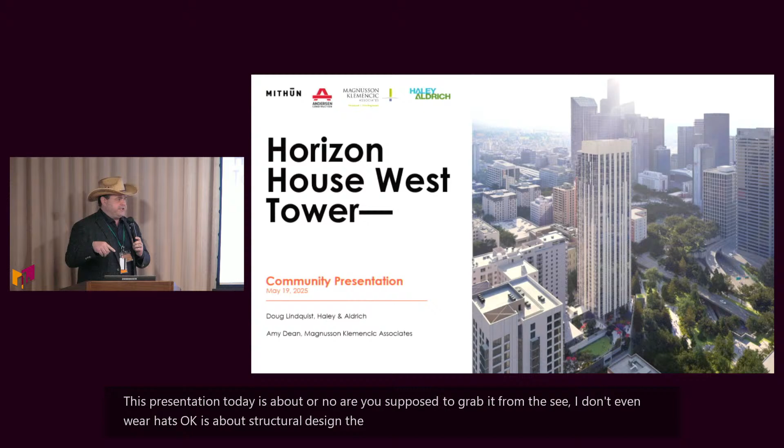All right, so welcome. This presentation today is about structural design. The last presentation we gave was more about logistics, which we'll probably have a follow-up presentation on. But this one, due to popular demand, is about structural design, going into depth about the soil mechanics of the footprint of our West Tower project.

And with me we have Amy Dean from MKA, Magnusson Klemencic Associates, and also Doug Lindquist from Haley and Aldrich, the geotechnical engineer. Both firms are top shelf, very well known throughout the Seattle area. Also in the room we have Mithun Architects, and also Andersen Construction.

Great, all right, so yeah, let's just get started. This is Doug Lindquist. The other one is Amy.

Thank you, it's a pleasure to be here. My company starts each meeting with a safety moment, so I thought we'd do that right here.

And what to do in the event of an earthquake: you should drop, cover, and then hold on. Maybe find a table or something like that you can get under if there's a seismic event, and then wait it out. You do not want to run out the front of the building, because things sometimes fall off the fronts of buildings.

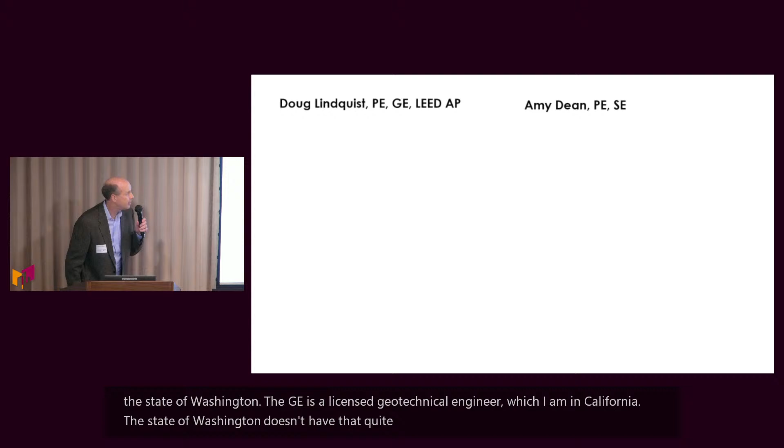PE stands for Professional Engineer, a license in the state of Washington. GE is a licensed geotechnical engineer, which I am in California — the state of Washington doesn't have that quite yet. Amy has SE, which is structural engineer, and then LEED AP is Leadership in Energy and Environmental Design, Accredited Professional.

So I'm a local person. I grew up a little south of Seattle, went to the University of Washington for my bachelor's and master's. Then I got active in public organizations related to my field, becoming president of the Seattle Section Geotechnical Group of ASCE, the American Society of Civil Engineers.

Then I joined the ASCE 61 Code Committee for the seismic design of piers and wharves. Then got active in the Earthquake Engineering Research Institute, becoming a board member of the state chapter. And because I work so closely with structural engineers like Amy, I wanted to better understand their language, so I joined the Structural Engineering Association of Washington and got involved in their Earthquake Engineering Committee.

I had the opportunity to go to Japan after the March 2011 earthquake and tsunami. That was actually 14 years ago this month that we were in Japan observing the damage from that earthquake. And we have a very similar hazard off our coast of Washington to the type of earthquake that occurred in Japan at that time.

One of the highlights of my career was speaking at my master's thesis advisor's symposium in honor of him — he literally wrote the book on geotechnical earthquake engineering. And another highlight of my career is being here with you all today. So thank you.

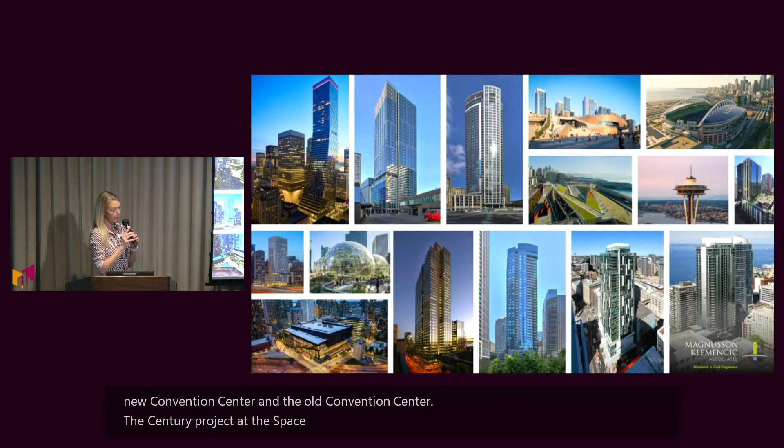Here are just a handful of Seattle-based projects that we worked on as structural engineers: the Amazon Spheres, the new convention center and the old convention center, the Century project at the Space Needle, Lumen Field, the Overlook Walk, and the new aquarium that just opened earlier this year. I'm going to pass it on to Doug, who will talk about Haley and Aldrich's work.

Some of you in the construction business may have heard of the company Hart Crowser, which I worked with for the first 22 years of my career. They were purchased by Haley and Aldrich 5 years ago, so I'm referring to all the projects as Haley and Aldrich projects. These are a number of projects I've worked on, including some Amy mentioned. The one on the top left is the 4th and Madison Tower.

Here we had to retain a building on two sides with the excavation going adjacent to it.

We're going to try out this mic instead. I'm seeing some positive signs there.

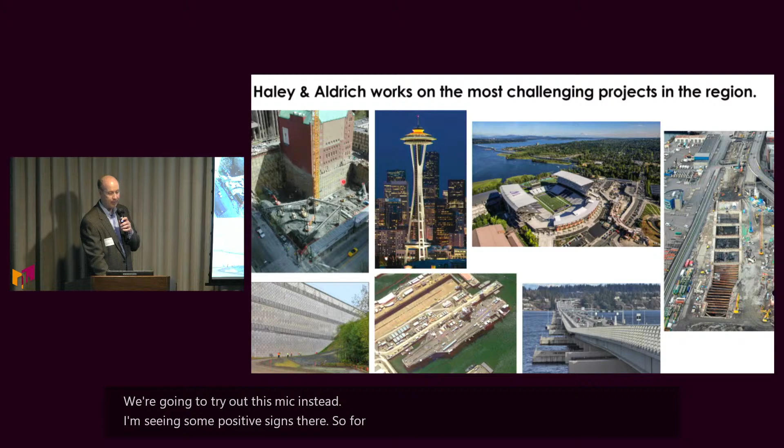For this site, we had to excavate on two sides. Our project for Horizon House, we're just doing the excavation on one side. I also worked on the Century project with MKA, and the Husky Stadium, Go Dogs, where we remodeled that I want to say 10 or 15 years ago. All three of those first projects I worked on with MKA.

The project on the far right is the SR-99 launch portal for the Bertha tunnel boring machine, and the viaduct, which has now been removed, is shown in the top right of that image. My company was brought in because of our deep excavation design experience and seismic design experience, and we are the engineer of record for that largest bored tunnel in the world.

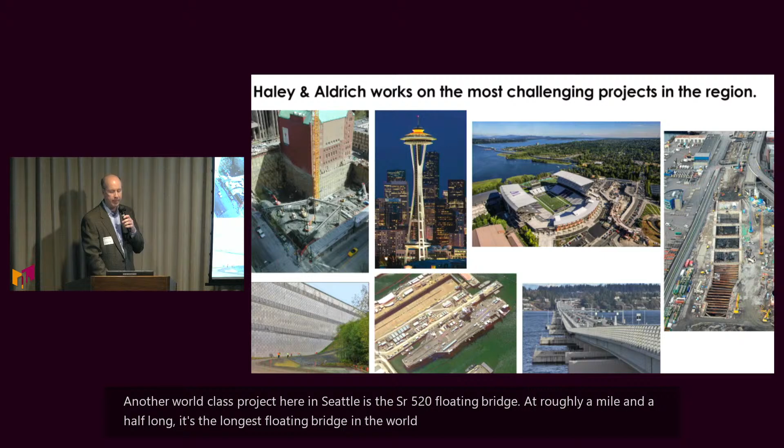Another world-class project here in Seattle is the SR-520 floating bridge, roughly 1.5 miles long. It's the longest floating bridge in the world, and we were brought in to design the anchors that are at the bottom of Lake Washington.

My company has also worked on all of the aircraft carrier piers in Puget Sound. There are 3 of them, and Pier B at Puget Sound Naval Shipyard is shown at the bottom.

One of my favorite projects that I did early in my career is a large mechanically stabilized earth wall, the tallest wall of its type in the Western Hemisphere. It essentially has steel reinforcing strips going back into the soil, and concrete facing panels holding the soil in place. It's 135 feet tall and was part of 13 million cubic yards of soil that came in for the construction of the third runway in the early 2000s at the SeaTac airport.

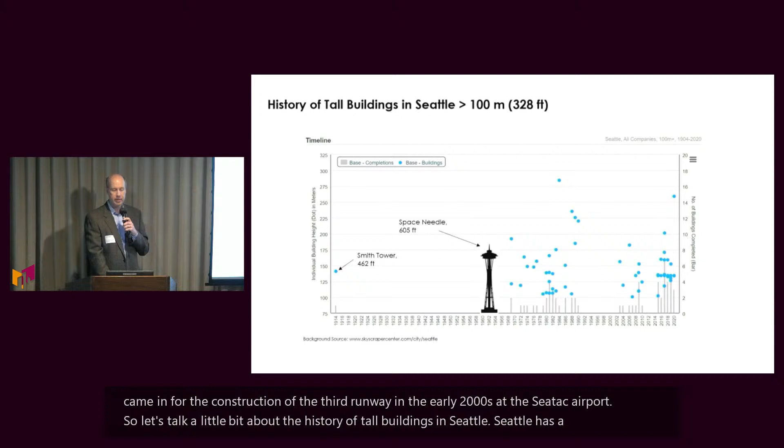Let's talk a little bit about the history of tall buildings in Seattle. Seattle has a really rich history dating back to 1914, when the Smith Tower was constructed at over 462 feet tall - an amazing civil engineering feat put on by the engineers of that time frame. That was a mere 63 years after the Denny Party settled in West Seattle in 1851, so an incredible feat there.

That was the tallest building west of the Mississippi until the Space Needle was constructed for the 1962 World's Fair. Unfortunately, I didn't work on that, but I did get to work on the Century project where we evaluated the Space Needle as part of the recent upgrades.

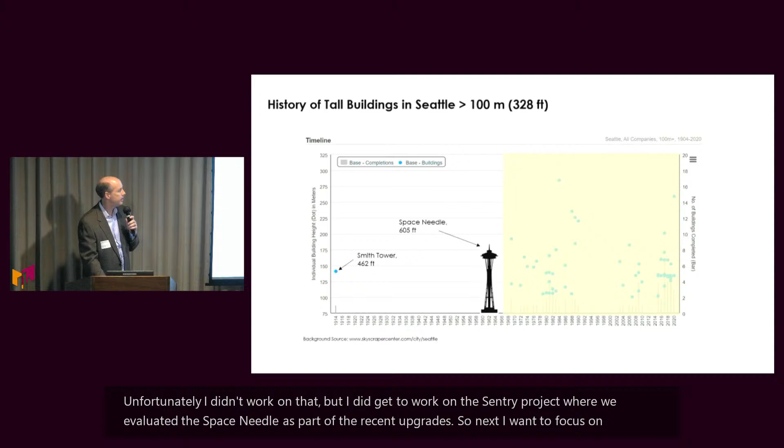There was a question to Horizon House about hiring an established geoengineering company to work on the Horizon House Tower, and I'd say you have very qualified geotechnical and structural engineering companies working on this building.

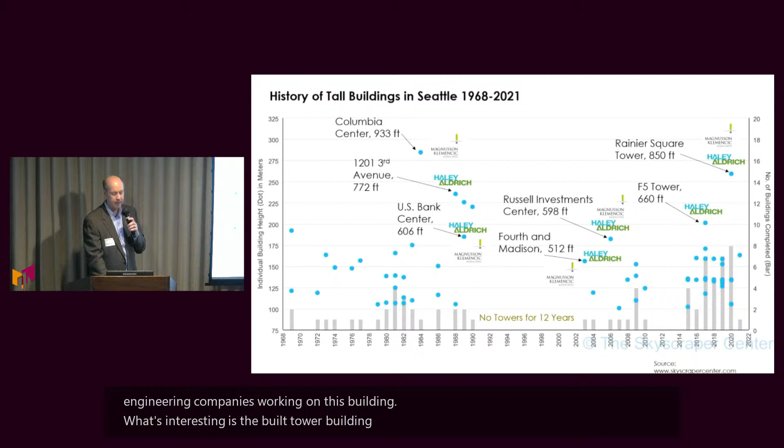What's interesting is the tower building is cyclical. There were a bunch of buildings in the 70s and 80s, and then there were no towers for 12 years, from '91 until 2002. Part of that was the recession of the early 1990s, the dot-com bust, and also just overbuilding of the downtown core in the 80s.

After that, we had a series or period of buildings. Then we had the Great Recession—because when you start a building, it takes multiple years to actually get it built, there's a lag between when you start and end. So after a building boom, there was the Great Recession from 2007 until 2009 that caused another period of no buildings being constructed.

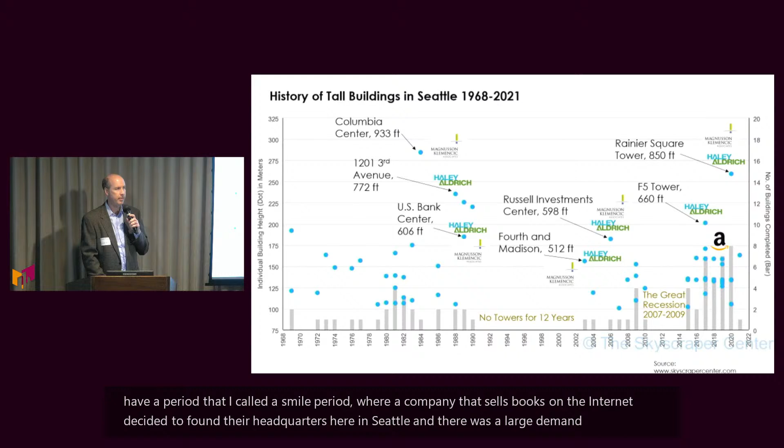And then after that, we have a period I call the smile period, where a company that sells books on the internet decided to found their headquarters here in Seattle, and there was large demand for office space and apartments to support the growth of the city. It was an incredible growth boom, which was really neat to see, this being my home city.

What that looked like in 2017—this picture shows where the tower cranes were. Many of you probably remember this, but Seattle had more tower cranes than any other city in the United States. More than Chicago, two or three times as many as New York, twice as many as Los Angeles. Just an incredible growth for a relatively small city compared to these other cities.

Then two years later, there's a comment saying Seattle has the most cranes in the country for a third year in a row. This is an incredible amount of growth for what was a relatively small city. Again, 59 cranes at that time—twice as many as Chicago and New York, a third more than Los Angeles, twice as many as Portland and San Francisco.

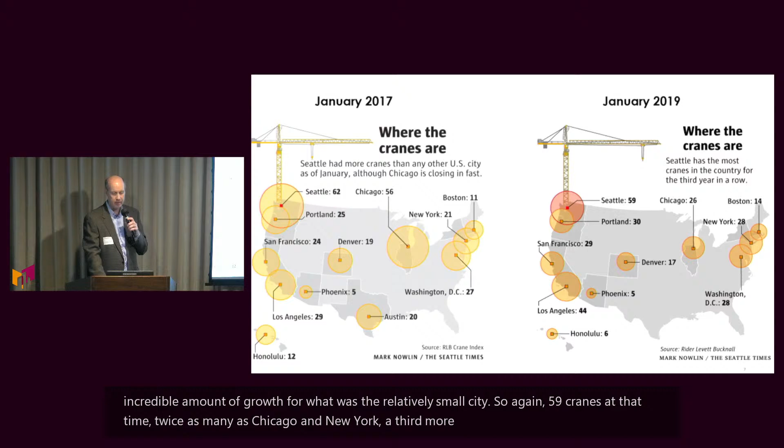So there's been—Amy and my firm being headquartered here—we all got to work on a number of high-rise buildings during this time frame.

So let's now move into the Horizon House project. A little bit of background: two tall buildings, and for the most part we're focusing on the seismic design of the new West Tower.

This is a cartoon I kind of like about a developer in Pisa who wants to save some money by avoiding soil tests—the Horizon House didn't do this. We've had the chance to do a number of soil tests at this site, and that's the first thing we do when we start a project. First we look at what existing information is available, then we supplement that with collecting additional soil information. Another big part of it is earthquake engineering, which is a large portion of the presentation today.

Other geotechnical elements include earth retention, shoring, or support of excavation. That's what you see when you drive around downtown Seattle and there's a big hole in the ground with a vertical cut right next to the city sidewalk and streets—that's what I'm talking about there.

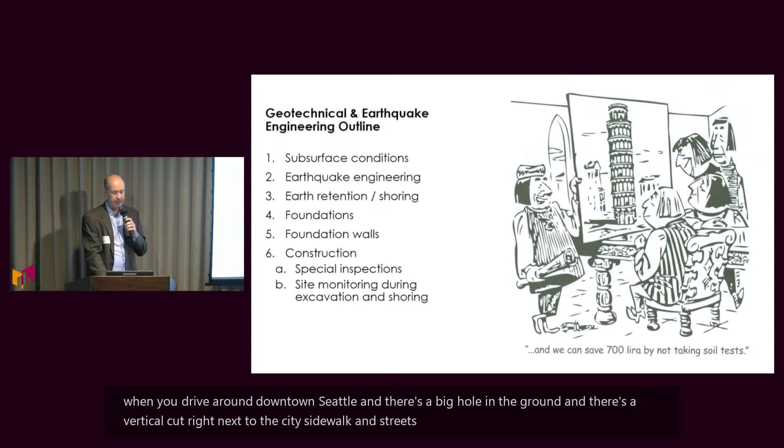Obviously you need a foundation for the tower, and it's important to put that on the appropriate soils. As you're coming back up, that support of excavation is usually temporary, so we have foundation walls. We provide recommendations for Amy's team to design those foundation walls as well as the foundation. Then during construction, the geotechnical engineer is on site to observe the soil conditions and make sure they're consistent with what we expected during our explorations and design. We also monitor nearby buildings, the support of excavation, and other elements.

These are a couple of pictures taken during our exploration program, showing the drilling rigs. We collect samples every 2.5 to 5 feet vertically during the exploration program at discrete locations.

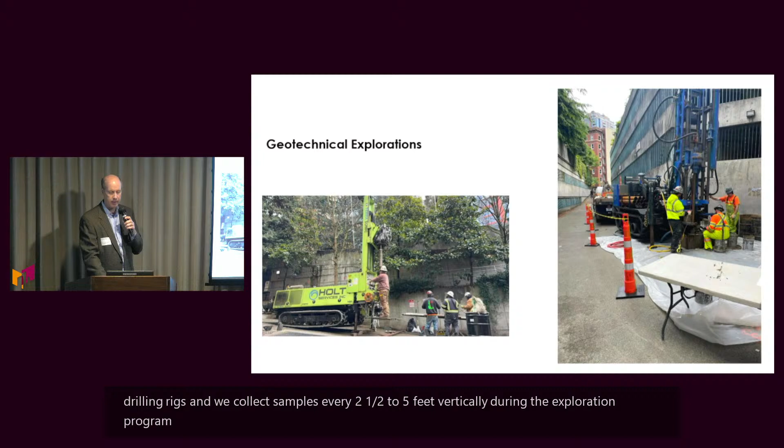I know this is kind of a tiny picture, but it's a satellite image illustrating the site. The site's bounded roughly where I'm showing the cursor, and all the black dots are existing explorations from before we started this project, while the blue dots are the new explorations we performed as part of this project. I also worked on the North Tower at Horizon House, so I'm thrilled to be involved in this project as well.

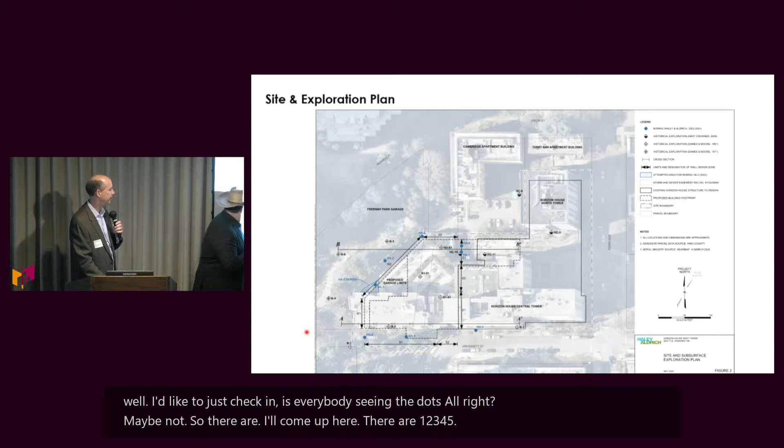I'd like to check in—is everybody seeing the dots all right? Maybe not, let me come up here. There are one, two, three, four, five, six, seven, eight blue dots, and the blue dots indicate new explorations for this project. And then the black dots—where were the previous ones? There's a black dot where the cursor is: here, here, here, over here, up here, down here. So another half a dozen or so.

This line in the middle, what is that line for? That's the one indicating the E1 zone, and E2, a distinction we used in our design recommendations. So those are cross sections, if you will.

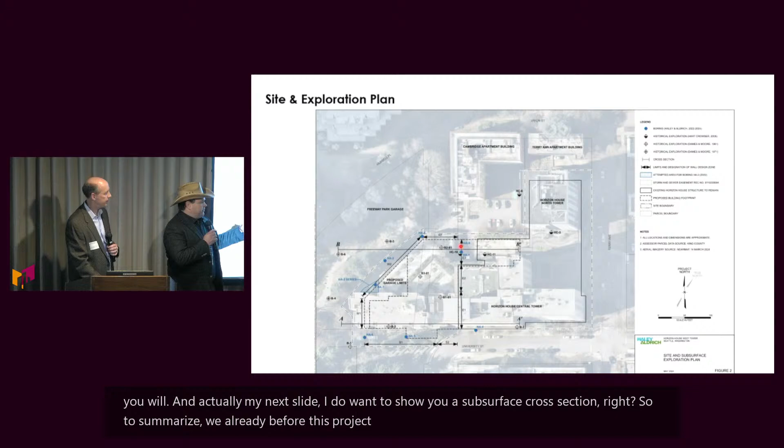My next slide, I want to show you a subsurface cross-section. To summarize, before this project began, there was already historic record from prior borings of the soil types in the West Tower region. Since then, we've bored an additional 7 borings just to reinforce our understanding of the subsurface conditions.

Thank you, Eli. You're welcome.

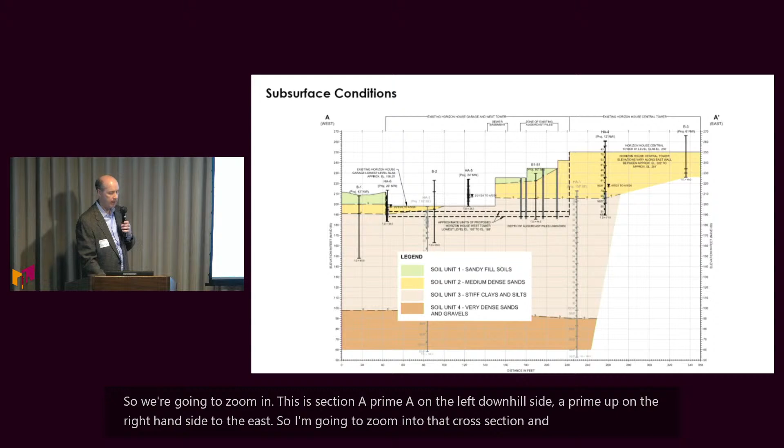So we're going to zoom in. This is section A prime, A on the left downhill side, A prime up on the right-hand side to the east. What you can see is the existing West Tower extends from here to here. So this white space in the middle and these steps are part of the existing West Tower.

And what we're going to do is follow this dash line down through here, and we're going to essentially dig out a little bit deeper to install a larger new West Tower in this footprint.

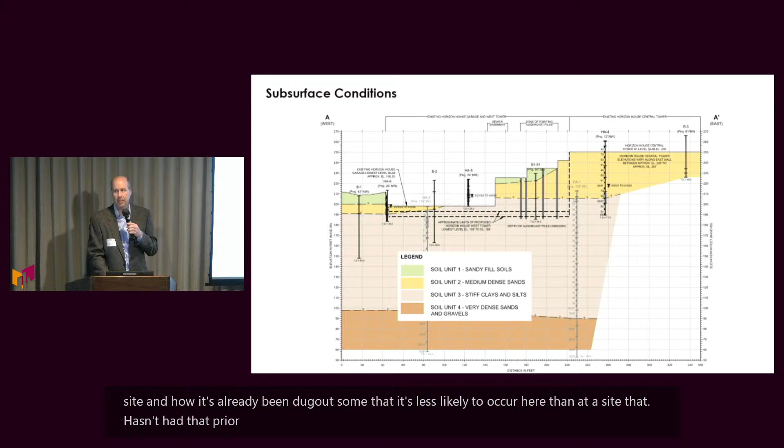There was a question about any archaeological artifacts we could come across during the excavation, and that's always a possibility, but given the previous activities and construction at this site, and how it's already been dug out some, it's less likely to occur here than at a site that hasn't had that prior development and buildings on top of the soil.

So we have 4 different soil layers. We have a green layer up at the top that's a fill type of soil - you wouldn't really want to put the foundation on that. Then we have this light tan or yellowish tan, which is a nice sand and gravel. Below that, we get into clay and silt. The yellowish layer and this clay silt are both glacially over-consolidated - the glaciers compressed those materials, so they're good for supporting new vertical loads. The lowest layer is very deep, a very dense sand and gravel. So the building foundation is intended to be on these more competent materials at depth, as opposed to the greener soil up near the ground surface.

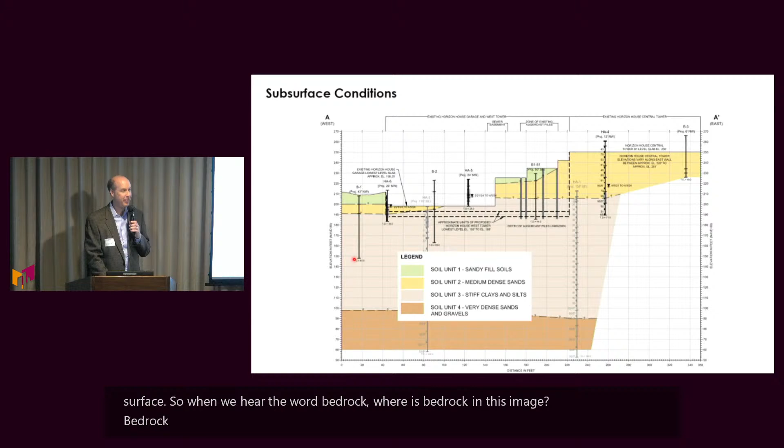So when we hear the word bedrock, where is bedrock in this image? Bedrock is about 3 to 4 miles below the ground surface in Seattle. There was a question about that, about, hey, can we put this building on bedrock? None of the buildings of this type, including the 850-foot tall project that Amy's and my firms worked on, are bearing on bedrock. They're bearing on glacially over-consolidated soils. We had 2,000 feet of ice compressing all these soils, and that's much heavier than any new building we're going to put on them.

So this is a favorite cartoon of mine. It's Calvin and Hobbes. Calvin's asking his dad, how do they know the load limit on bridges, Dad? And Dad says, well, they drive bigger and bigger trucks over the bridge until it breaks. Then they weigh the last truck and rebuild the bridge. And Calvin says, oh, I should have guessed. And the wife says, dear, if you don't know the answer, just tell him.

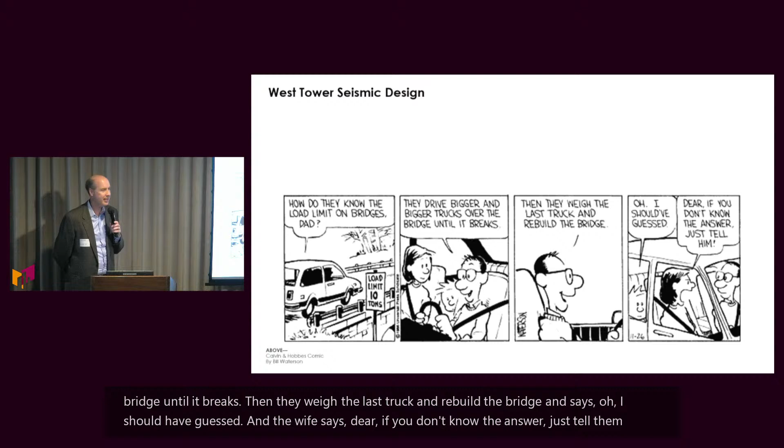So this is an example of performance-based design, and you're going to hear about performance-based design quite a bit in this presentation. But this is not how we go about doing it - this is an expensive and risky way of going about performance-based design. Instead, we use computer simulations to do our performance-based design, especially the performance-based seismic design we're talking about today.

As part of that, we start out with the geotechnical engineer performing what's called a probabilistic seismic hazard analysis. Some of the things I talk about and that Amy talks about are rather technical in nature, but I've been told that you are a very well-educated audience and lifetime learners, so hopefully you don't mind hearing some new things and are open to this.

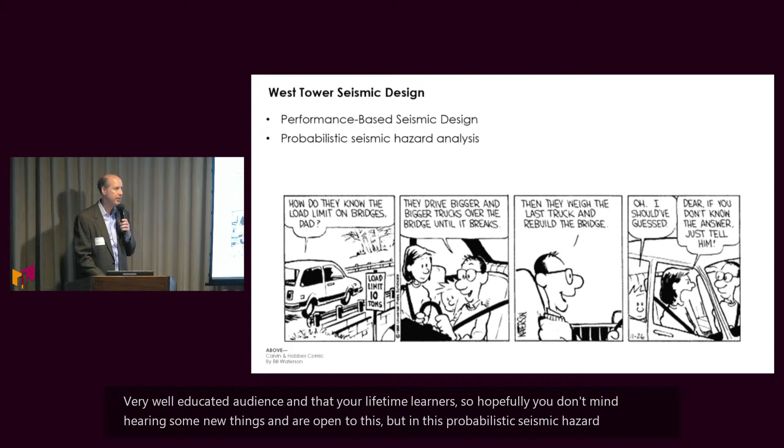In this probabilistic seismic hazard analysis, we take a look at all the possible earthquake scenarios that we think are reasonable, including big events off the coast and shallow crustal things nearby. We assign the likelihood that they occur or how frequently they occur, and then we look at, if that occurs, what will the damage be or the amount of shaking at our building site.

So when we do that, oftentimes people ask me, what magnitude is my building designed for? Magnitude 5, 6, 7, 8, 9? My response is that it's designed for all of them, because we are considering the full suite of earthquakes that could occur at the site.

We also know that there's some earthquakes that we just don't know about, and so we've assigned some probability of an earthquake occurring on a fault nearby that we just don't know about yet. We've tried to do that in a logical manner.

Once we know what the hazard is, we select and scale ground motions, and we've given Amy and her team 22 ground motion pairs. Those are orthogonal ground motions, 2 horizontal components, for her to put as input into her performance-based model and design model of the West Tower.

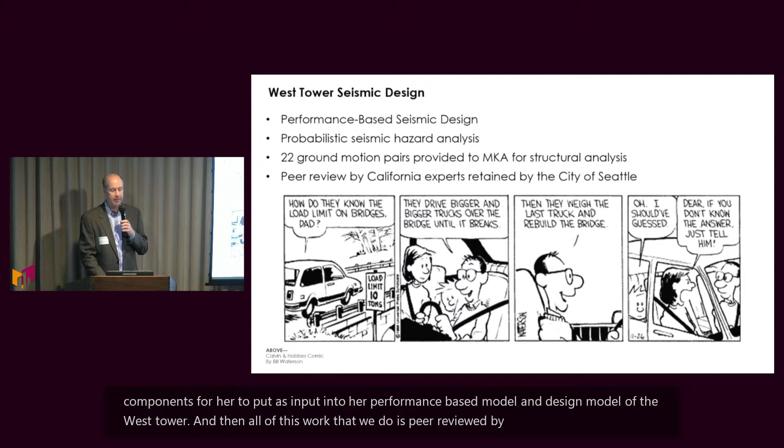All of this work that we do is peer-reviewed, usually by experts from California in earthquake engineering, structural engineering, geotechnical engineering, and seismology. Those experts are retained by the city of Seattle, so they have no vested interest in this project going forward. They could shut it down if they didn't agree with the recommendations that we're putting forward.

There was another question about whether there are any shortcuts or difficult decisions we had to make in the design process to save money or something like that. Really, there's not the opportunity to do that. We need to meet the standard of practice and the codes and procedures, and it's reviewed by experts from out of town, usually, who are very experienced with that. The city could potentially do this themselves, but they want really the top people in the industry to do it, and that's why they outsource that review, whereas they would just review most normal buildings in-house.

I heard this was one of your homework assignments, to watch this video on the great earthquakes of the Pacific Northwest. Did some of you watch this? Yeah, glad to hear it.

I would ask what your thoughts on it were, but I don't have time, and I don't think Eli wants me to spend that much time hearing from all of you today. But I would like to say that I thought it was a really good, unbiased account of the subduction zone hazard that we have off the coast. I thought he did a good job dispelling the myth that a large magnitude earthquake off the coast could cause a tsunami in downtown Seattle.

I also thought it was really neat that he mentioned Brian Atwater's work that identified an orphan tsunami that occurred in Japan. The tsunami occurred in Japan, and they were able to track it back to the parent earthquake that occurred right here in the Pacific Northwest on January 26, 1700, around 9 p.m. It's also really cool.

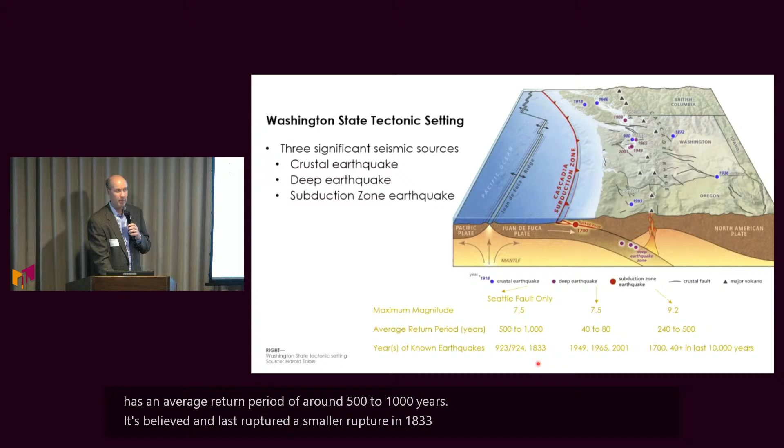The Seattle Fault has the potential to be up to magnitude 7.5, has an average return period of around 500 to 1,000 years, it's believed, and last ruptured in a smaller rupture in 1833, which was a little before the 1851 Denny Party, so they missed out on that, and then a larger rupture in the winter of 923 or 924 AD.

The earthquake source that all of us know the most about is probably the Nisqually earthquake type of source, which is these deeper subduction zone earthquakes. They occur around 30 miles deep, so by the time they get to the ground surface, the energy is dissipated, and they're not as damaging as crustal earthquakes, but they're still noticeable and can cause damage to certain structures.

Then there's the big one that people refer to, the subduction zone earthquake. That's the source that runs along the coast from Vancouver Island all the way south to Northern California, capable of a magnitude up to 9.2, possibly 9.3, occurring every 240 to 500 years, so a lot more frequently than the Seattle Fault. It last occurred in 1700, with about 40 of them in the geologic history of the last 10,000 years.

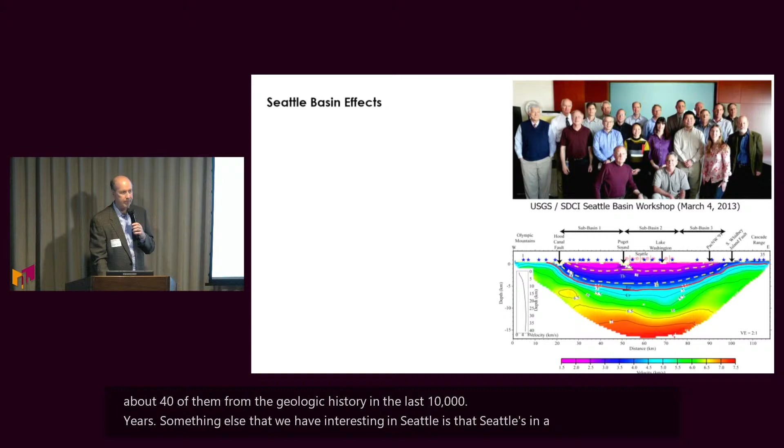Something else interesting in Seattle is that it's in a basin. Remember how I shared that the bedrock was 3 to 4 miles deep? The bedrock could be considered either this dark blue or the light blue coloring here. Over on the Olympic Mountains to the west, that's up close to the ground surface. In the Cascade Mountains, it's also up close to the ground surface. In Puget Sound, Lake Washington, and Seattle, it's relatively deep.

What that basin can do has been studied a fair bit. There was a workshop put on by USGS and the city of Seattle, and yours truly is right there in the middle of it—if you tell me I haven't aged a bit, I won't be offended. There was another workshop 5 years later that I also presented in.

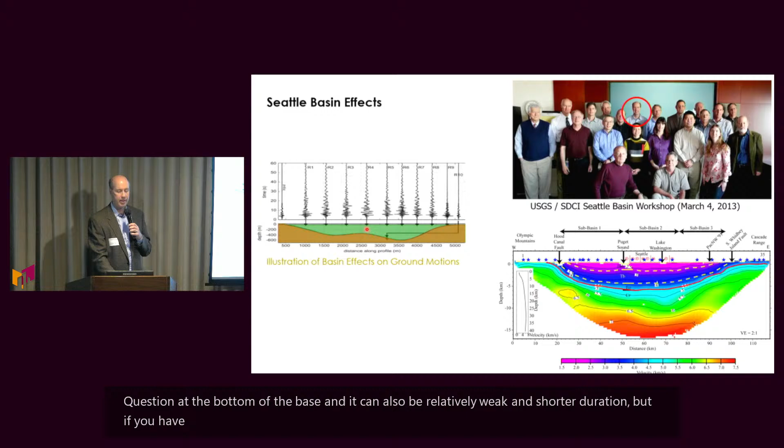What the basin does—this image a coworker of mine put together shows that if you have a ground motion on the side of the basin, it can be relatively weak and of shorter duration. If you have a ground motion at the bottom of the basin, it can also be relatively weak and shorter duration. But if you have a site on top of the basin, it acts kind of like a bowl of Jell-O: you shake the bowl, and as you're shaking it, the Jell-O can shake stronger than what you're shaking the bowl with. Then when you stop, the Jell-O still keeps shaking for a little while.

So we have that geologically here in Seattle. Even though these are very good, glacially over-consolidated soils, they're still kind of like Jell-O compared to the rock below. And so we account for this in our design.

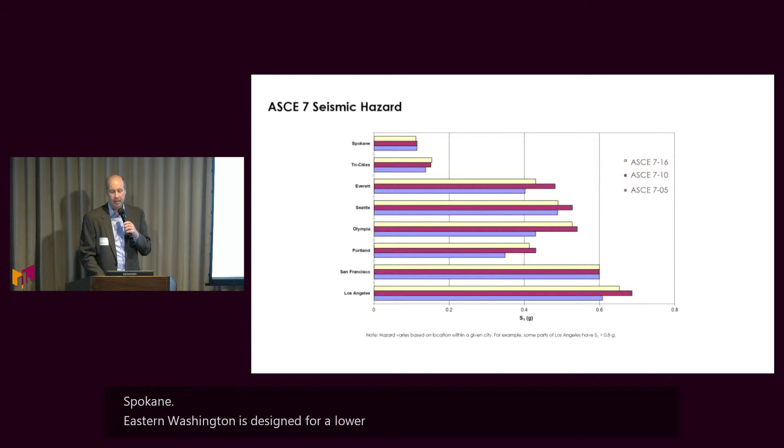This image shows 3 cycles of the building code. The top one is the current code buildings are being designed to, ASCE 7-16, published in 2016. Before that, it was published in 2010, and before that in 2005. The x-axis is a measure of ground shaking—a 1-second spectral acceleration in this case. You can see that Spokane in eastern Washington is designed for a lower seismic hazard level than western Washington. They just don't get as many earthquakes, and they're farther from the subduction zone hazard.

As we get to Everett, Seattle, and Olympia, they're all in the same ballpark. Then down to Portland, it drops a little, and once we get into California, their crustal faults rupture a lot more regularly, or more frequently, than ours in the Pacific Northwest.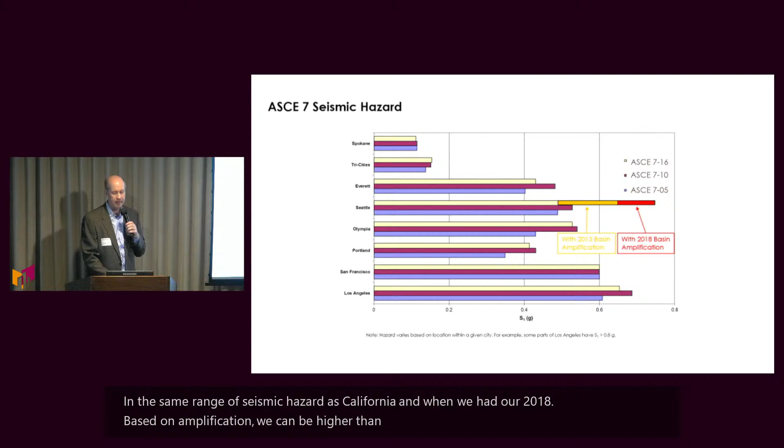What's interesting, though, is when we add the 2013 Basin Workshop hazard to our current building code, we actually get up there in the same range of seismic hazard as California. And when we add our 2018 basin amplification, we can be higher than some cities in California. So what we're designing to is actually a pretty large level of seismic shaking.

This is an interactive slide. My question is: which earthquake record is M9, which is M8, and which is magnitude 7? Let me tell you what you're looking at here. The x-axis is time after the start of the recording, and the y-axis is the acceleration in terms of percent of gravity. All of these earthquakes have the same source-to-site distance as well, roughly how close the site is to where the earthquake rupture was.

The bottom one has a peak ground acceleration of 0.1 g, then 0.26 g for the middle one, and 0.42 g for the top earthquake.

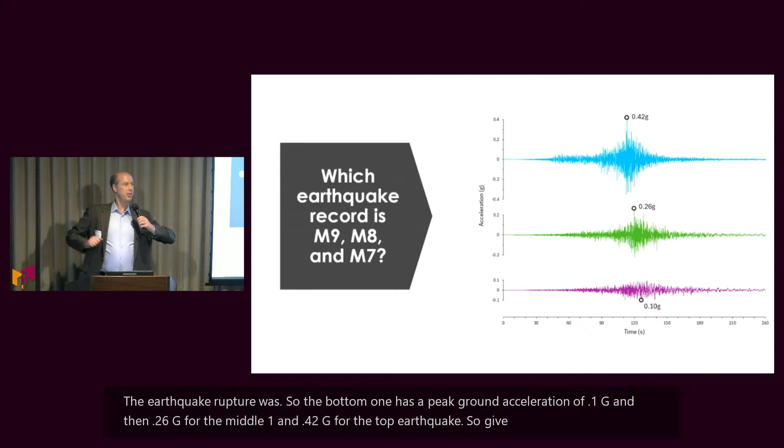So who thinks the bottom one is a magnitude 9 earthquake? No, one person. Who thinks the middle one's a magnitude 9 earthquake? Nobody? And who thinks the blue one's the magnitude 9 earthquake? A lot of participation. So you're probably wondering why I'm asking you this question, and it's because it's a trick question, of course.

So all 3 ground motions are from the same earthquake, the 2011 magnitude 9.1 Japan earthquake. We have the same hazard off of our coast, and they're all at about the same distance as Horizon House is to the Cascadia subduction zone.

So what I want to share with you is that magnitude is not a good predictor for damage from an earthquake. Instead, there's 3 characteristics, and it's the ground motions themselves that cause the damage. So there's 3 characteristics of ground motions that cause damage from an earthquake.

One is the amplitude, like how strong it's shaking. A second is the frequency content. If it's shaking super fast, it won't damage a tall building that needs kind of the slower shaking to cause the damage. And the third is the duration, just how many cycles of shaking that earthquake is contributing.

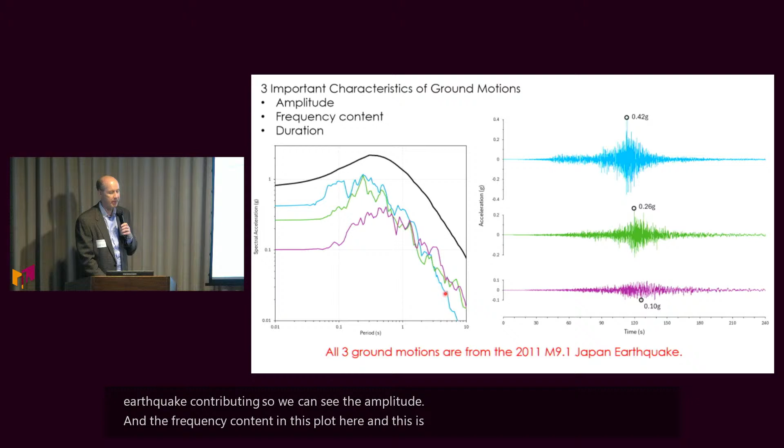So we can see the amplitude and the frequency content in this plot here. This is getting technical again, but it's called a response spectrum. This is what we, the geotechnical engineer, give to the structural engineer so they can design their buildings. So these three earthquake response spectra are shown here.

What you see is that actually the purple one, even though it had the lowest peak ground acceleration, which is the point here at the y-axis, it has the highest 3 to 4 second period spectral acceleration. And then what I want to point out is these three ground motions from similar source, similar distance, all of them are well below this black line.

And this black line is what we're designing the Horizon House to. What's also significant, if any of you are scientists or engineers, you'll notice the scale on this plot is log-log. So that means that the differences between the lines are much more than they would be on a standard linear scale.

So when we do our seismic hazard analysis, we essentially get a suite of response spectra. We can look at the return period, and what these curves are going from is a return period. The bottom blue line is a return period of 72 years, to the top line being a return period of 5,000 years.

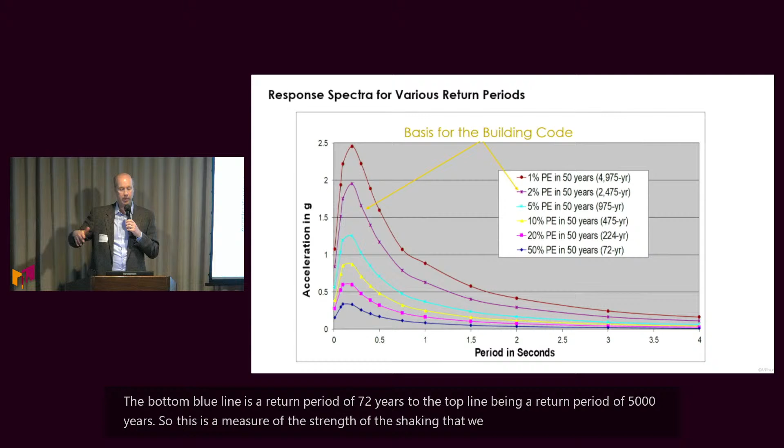So this is a measure of the strength of the shaking that we can get for a bunch of different return periods. I'll point out that the building code is based on the 2,475 year return period. So on average, we would get an earthquake that would exceed or equal this line here every 2,500 years. And then the building code for the design earthquake is defined as 2/3 of that level, but we're giving Amy ground motions at this highest level for her to do her structural 3D modeling with.

And this is another really cool plot, and it shows you a lot of information if you can understand what it's doing. This is something called the disaggregated hazard. It's a measure of where the earthquake damage or hazard is coming from, with the percent contribution on the y-axis. So the bigger the bar, the bigger the percent contribution.

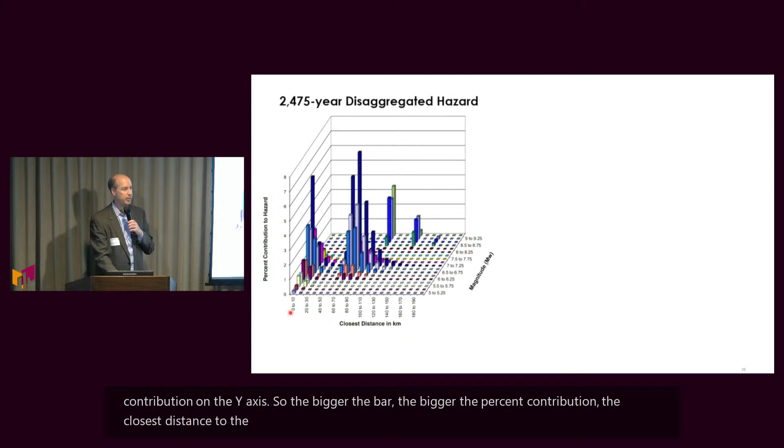The closest distance to the fault, or the distance from the earthquake to the site, is on this x-axis. And then the magnitude of the earthquake, from 5 to 9 plus, is on this axis. So from looking at the results of our seismic hazard analysis, we can identify these really close-in 5 to 7.5 magnitude earthquakes as crustal earthquakes.

These are like the Nisqually earthquake, the intraslab earthquake, because it's 30 miles deep and it's of similar magnitude as the crustal earthquakes. And then we have the interface earthquakes. Those are the big subduction zone earthquakes that are far away, but they're very high magnitude.

And so this changes depending on the period of our building. So for a building such as Horizon House, we're up closer to the 3-second period, and you can see that it's the crustal earthquakes and the large magnitude subduction zone earthquakes that produce the most hazard at the site.

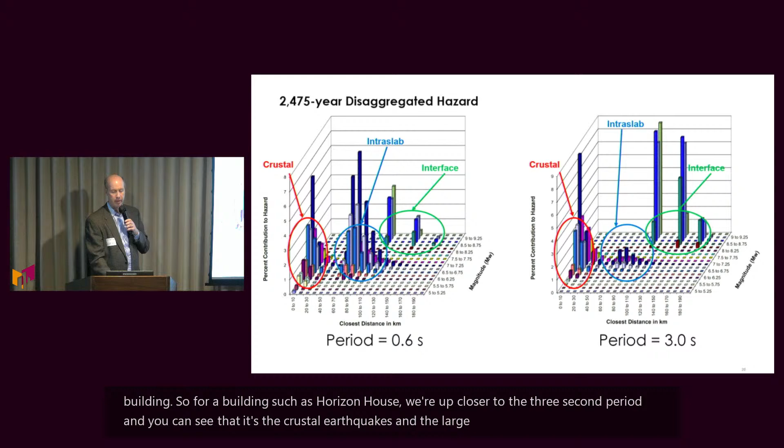Can you describe what is a building's period? There's a rule of thumb. The period of a building—shorter buildings are stiffer and they have shorter periods. Taller buildings are more flexible and they have longer periods. And the rule of thumb is the period is approximately the number of stories divided by 10. So for a 33-story tower, one would expect the Horizon House building period to be around 3.3 seconds.

So is that 3 seconds for it to sway from one extreme to the other? Yes.

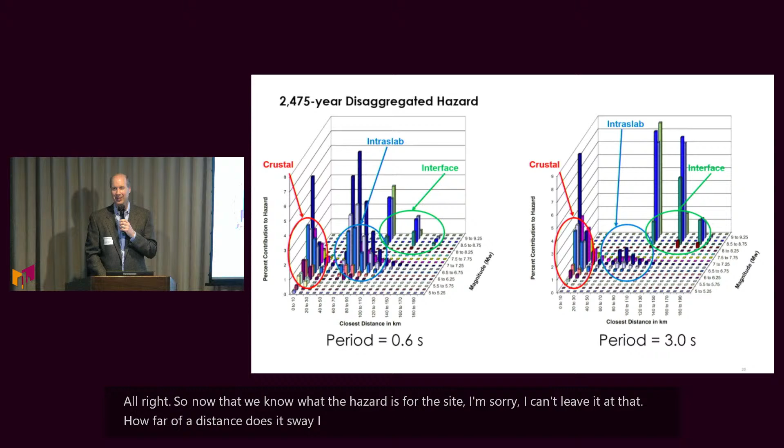All right, so now that we know what the hazard is for the site—I can't leave it at that. How far of a distance does it sway? I don't want people to think it's swaying like 30 feet one direction, 30 feet, all in 3 seconds.

Yeah, Amy will get into that when she does her presentation. Okay, all right, we'll hear it later. Yeah, that's a structural engineering question.

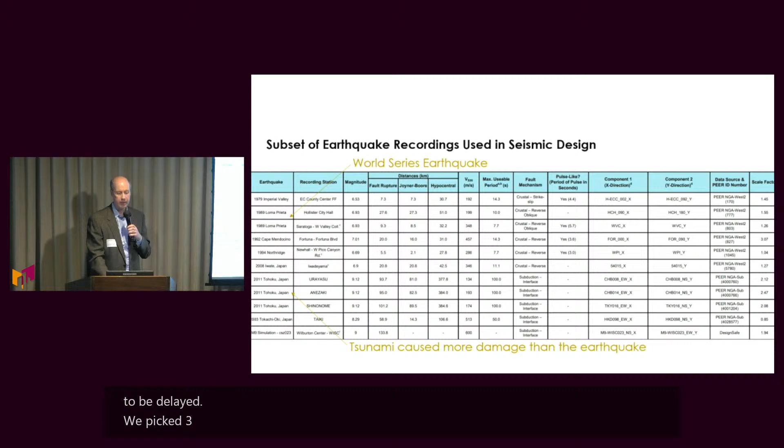Okay, so now that I know what this hazard is, I want to select ground motions, and I'm going to select them proportional to their percent contribution that I determined from the disaggregated hazard plots. For this longer period Horizon House, we picked 6 crustal records and 5 magnitude 9 subduction zone records. We picked 2 records from the 1989 Loma Prieta earthquake, which caused the San Francisco Giants and Oakland A's World Series to be delayed. We picked 3 from the Tohoku earthquake, the 2011 Great Japan earthquake, which was almost a twin of the hazard we have for the Seattle area.

There's also been research done at the University of Washington and USGS where they simulated what a magnitude 9 rupture would be from computer models. We've incorporated one of their models because it accounts for the local geology here in the Pacific Northwest.

We have scale factors, and they range from, almost all above 1, from 0.80 to 2.47. I point this out because even for these biggest earthquakes out there, most aren't as strong as what we're designing to, so we need to scale them up. The one with a scale factor less than 1 is very close to the site, similar to our magnitude 9 subduction zone hazard, and because of that close sourceness, it was stronger than what we would normally design to.

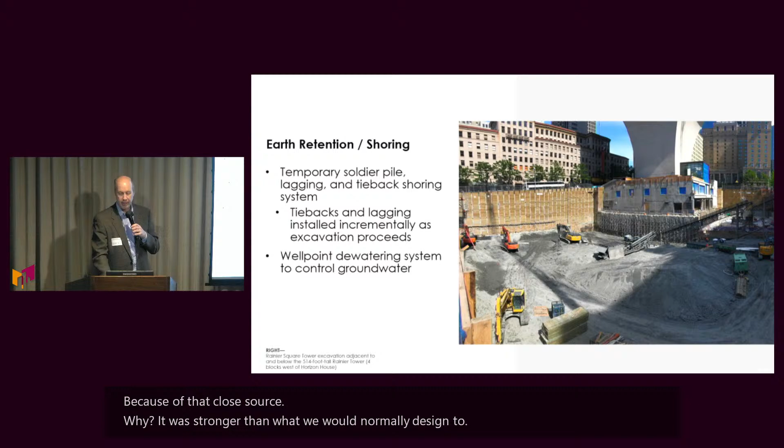So I'm going to wrap up with some geotechnical engineering. Moving away from earthquake engineering, we have earth retention and shoring, constructed using temporary soldier piles, lagging, and a tieback system, with the tiebacks and lagging installed as the excavation is underway.

There are vertical elements, big steel beam soldier piles, and as we dig out the soil, as we're excavating, timber lagging is placed between the soldier piles to hold the soil in place. Then they install a tieback anchor that goes back into the soil to hold the face tight to the existing soil. This is the Rainier Square Tower.

They had a well point system to capture groundwater, and we'll likely have that on our project too. Again, the foundations don't go to bedrock—the foundations are large mat foundations.

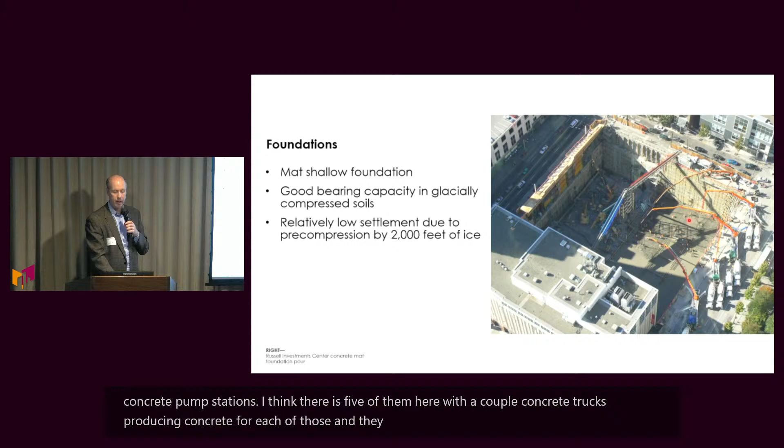This is the Russell Investment Center between 1st and 2nd in downtown Seattle. It's on a large mat foundation. You can see concrete pump stations—I think there are 5 of them here with a couple concrete trucks producing concrete for each, and they're essentially going down into this 14-foot thick mat foundation.

Our building's not as heavy and tall as this structure, so our mat foundation is about 10 feet thick, but it's still a pretty impressive and sizable structure. We have good bearing capacity because of glacially compressed soils, compressed by about 2,000 feet of ice.

The final element is the foundation wall design. The foundation walls essentially take over supporting the lateral load once the temporary shoring and earth retention is finished. We're designing the Horizon House for groundwater pressure, soil pressures, surcharge from the central tower, seismic soil pressure, as well as seismic surcharge pressure from the central tower. You'll see some of those loads in Amy's presentation as well.

And that's all I have. I look forward to answering some questions afterward, but I'm going to hand it off to Amy for the structural engineering. Thank you.

Doug gave you guys a lot of information about the dirt, so let's go up into the tower and check out this building. So just as a starting point, I want to talk a little bit about the building codes.

Doug commented on the ASCE 7, which is where a lot of our code information comes from, but the legal document that we are designing to is the Seattle Building Code. That is a document adopted by Seattle itself. And from that, we have material standards and design standards.

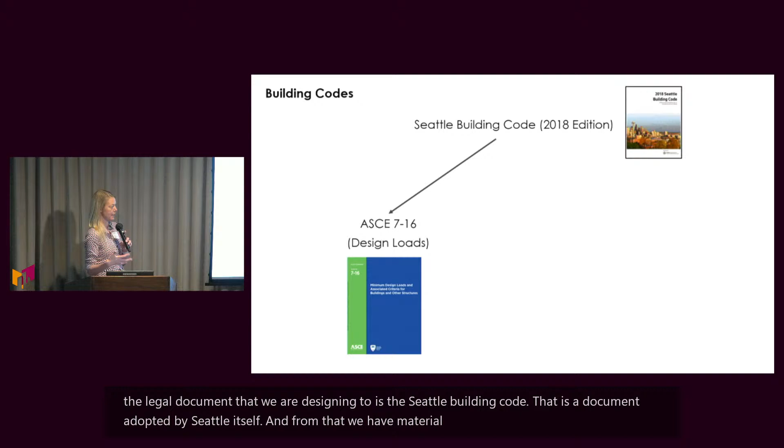ASCE 7, which is what Doug talked about, is design loads. We'll talk about loads in a minute. ACI 318 is the concrete material standard, and much of this building is a concrete building. Then for some of the steel elements, AISC, the Steel Construction Manual. So these three books, four in reality, we spend every day looking at and making sure that we're meeting all of these standards.

Let's talk a little bit about engineering basics. We'll step back, and we're going to talk about vertical, so gravity loads, and then also horizontal lateral loads. So talking about gravity loading.

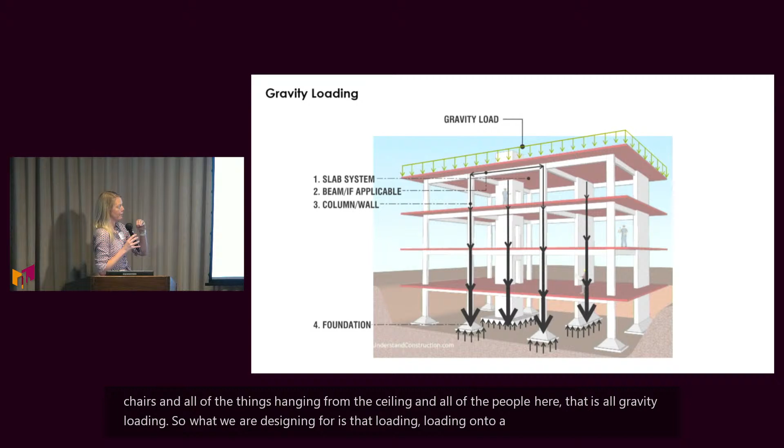When we're standing on this floor, you see all of our chairs and all of the things hanging from the ceiling and all of the people here, and that is all gravity loading. So what we are designing for is that loading onto a slab, and then from there transitioning to columns and walls. That builds up over time, over all the floors, down to the foundation. So that's what the foundation soil is supporting, is all of the loads over the whole building.

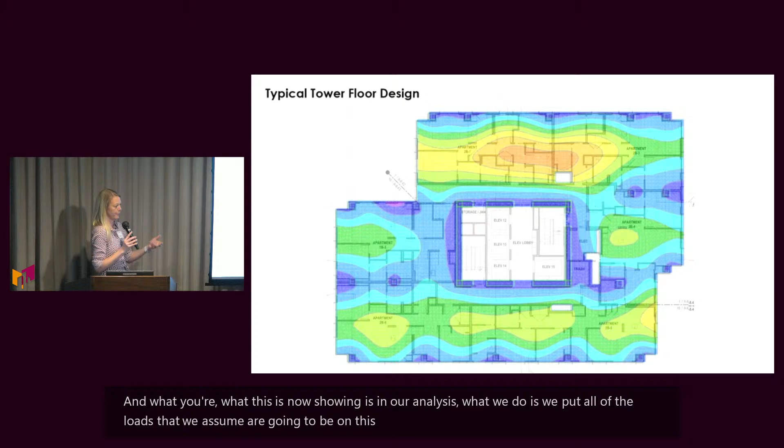What this is now showing is, in our analysis, what we do is we put all of the loads that we assume are going to be on the slab and analyze the slab. So that's how we design the reinforcing that's going to be in the slab, et cetera.

But what this is showing is actually a deflection plot, what we would call a heat map. You'll see the purple dots around the columns and the core, and that's where we are going to see no deflection of the slab, right? The slab is constant because there's that stiff point. Up at this north end, you'll see this orange portion, and that is where we expect, based off of our analysis, to see the most deflection of the slab. What we are really looking at is to make sure that deflection—there are code limits to it—but beyond that, even more so, that it's not something you're going to notice.

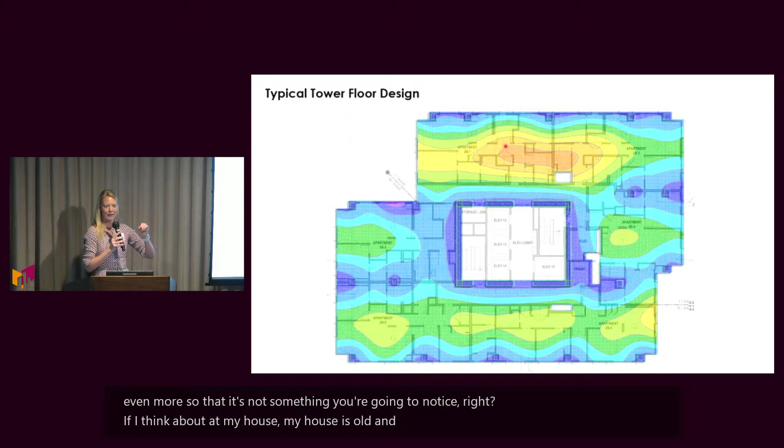If I think about it, my house is old, and there's a point in my house where I put a pen down and it will roll to the corner. That's not what we want. So we're working to do the analysis to make sure that everything for you as residents will feel flat and normal, and we're using our analysis to confirm that, based off of the loading that we are assuming is going to be there, that will happen.

What is the maximum allowable deflection by code? The maximum allowable deflection by code is a calculation of L, so a length, over 360. That typically averages out to an inch in a 33-foot bay. That orange portion is less than 3/4 of an inch, and that's over the full age of the building—what we are looking at is, in 5 years, that's the deflection that we would see over the slab.

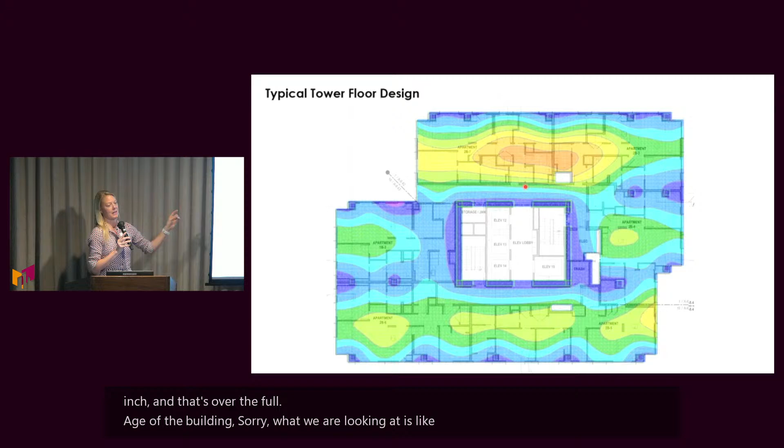So now moving on to, I'll say, the more interesting part, depends on who you ask, lateral loading. So the two main lateral loads that we look at on a building are wind loading and earthquake loading, which Doug talked about a little bit.

Here in Seattle, while we know that the wind or the earthquake loading is in general going to be what controls the design and how we look at the building, we also are looking at the wind loading on this. So what you see in these images is actually what's called a wind tunnel. So the red—oops, go back one second.

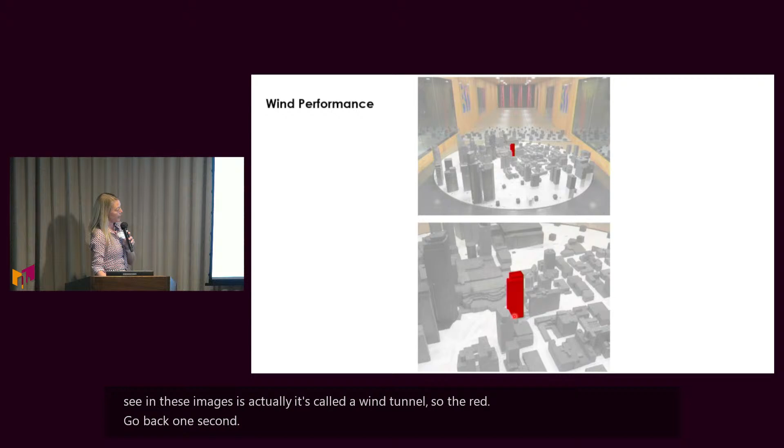The red is the Horizon House West Tower, and the gray buildings around it are all the buildings in the area. They build a scale model of the buildings and put it inside this contraption, pushing wind at it at 15-degree angles so you can see what it looks like.

Just for example, this gray is not Horizon House, it's another project, but you can see what they're looking at is all of the wind loading on the building, giving us that information to make sure we're designing to the correct loads for the worst case windstorm we can imagine here in Seattle.

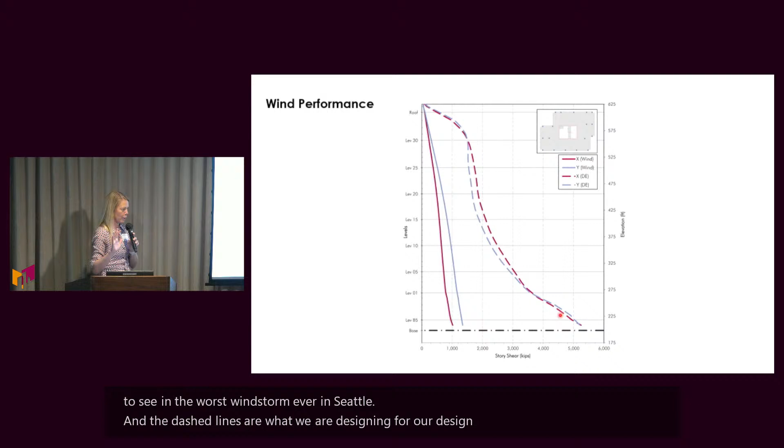So just to give you an idea, the solid lines are the amount of load the building is going to see in the worst windstorm ever in Seattle. The dashed lines are what we are designing for our design earthquake. We'll talk about that in a second, but you'll see it's about a magnitude 5 times smaller, the wind loading to the earthquake loading.

Even more so than that, one is how much does the building feel in a windstorm, but two is what do you feel in a windstorm? What you'll see here, the green dot and green line are accepted sway. As Eli asked earlier, what is the period of a building? Period of a building is somewhat dependent on multiple analysis elements we have, but it's how much the building is going to move, how long it takes to go from one extreme point to another.

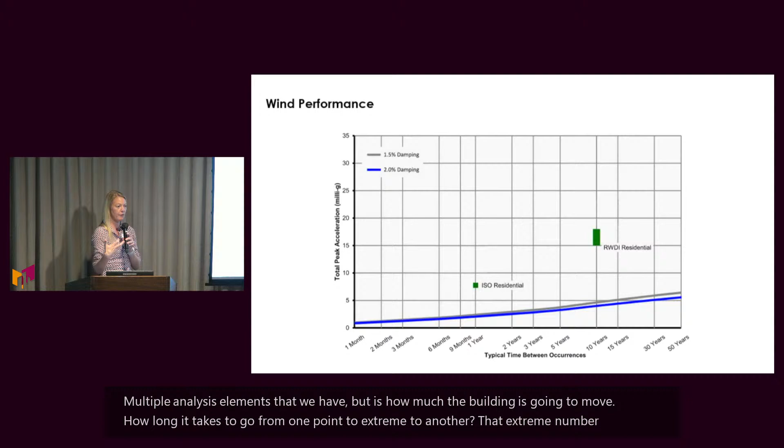That extreme number changes depending on what the force is on the building. It could be an inch if it's a really small force, or it could be much larger. What this is looking at is how much the building is going to move in more frequent windstorms, and making sure the building is comfortable for your occupants.

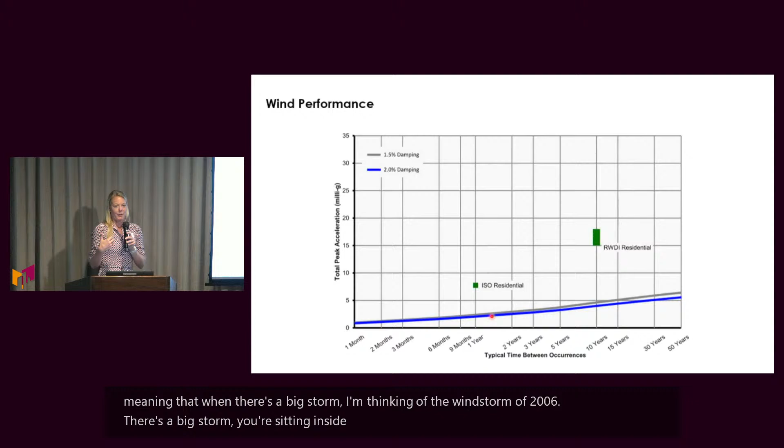The blue and gray lines at the bottom are the analysis of the Horizon House Tower. The green are the acceptable levels. You'll see we're significantly below the accepted levels, meaning that when there's a big storm - I'm thinking of the windstorm of 2006 - you're sitting inside your unit, you're not going to feel uncomfortable, you're not going to feel nauseous, because the building isn't moving enough to create that problem.

So moving on, we're going to talk about earthquake performance. What you'll see here on top is building performance levels, and I'll talk about that in a bit, and on the side is earthquake levels. So design earthquake, which is what Doug had noted as 2/3 of the maximum considered earthquake, is what the building code requires that we design all buildings to.

That's that red dot that says, in a design earthquake, the building is going to have moderate structural damage. That means most of the damage you'll see is what we call non-structural elements, partition walls, things of that sort that aren't actually part of the system holding the building up. Every building is designed for that red dot.

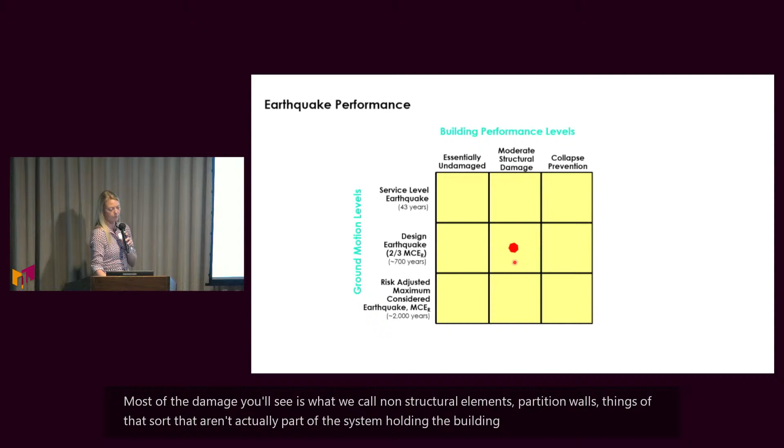What we are doing at Horizon House is also designing for two other earthquake types. A service earthquake, which is a 43-year earthquake - this is a frequent earthquake - and the intent is that the building will be essentially undamaged. You'll never notice that there was an earthquake.

The other part of this is the maximum earthquake, which is the big earthquakes that Doug was showing, and we're designing for collapse prevention. That means there are limitations to what the building can withstand, and we're confirming that with the maximum considered earthquake - that's what we're designing for.

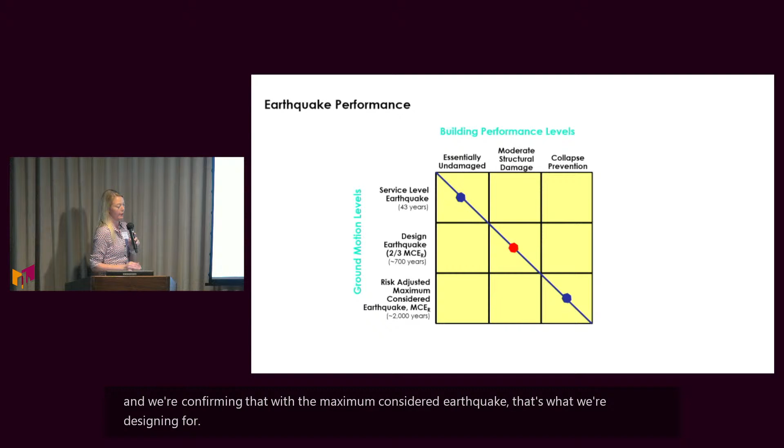Can I elaborate on that? Yeah, I can go into it a little more as we continue, because it may be helpful to see some of the other slides.

Doug's team has given us 22 ground motions of these very large earthquakes that are then ratioed up, and we are going through a rigorous analysis on our peer review side to confirm multiple things: loads on certain elements, how much the building moves, the period of the building, and making sure there's not some strange transition of the period under all of those earthquakes. That's above and beyond what you have to design by code, part of that being how big the West Tower is.

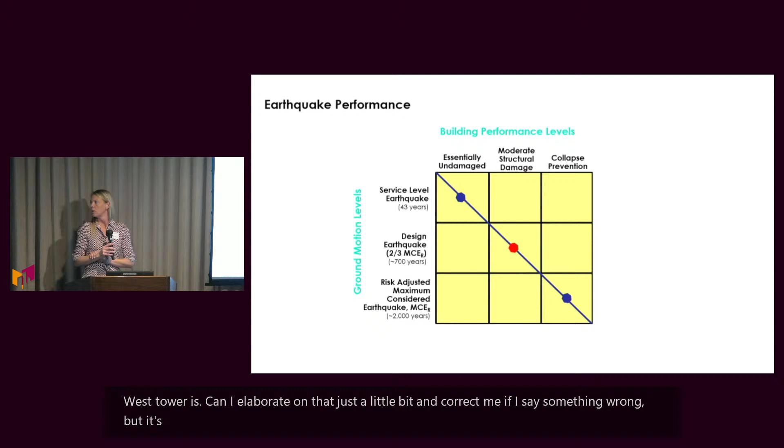Could I elaborate on that just a little bit? Correct me if I say something wrong, but it's also intended that you could exit the building after the earthquake, that the building hasn't fallen down or pancaked or something tragic, disastrous like that. Thanks, Doug.

So just to give you a sense, I'm guessing many of you can raise your hand - we're here in 2001 for Nisqually.

The top image is the ground motion for the Nisqually earthquake. This bottom ground motion is for a 2010 earthquake in Chile, which is similar to the earthquakes we are analyzing for our earthquake design. You'll see it's significantly larger forces than what we saw in Nisqually.

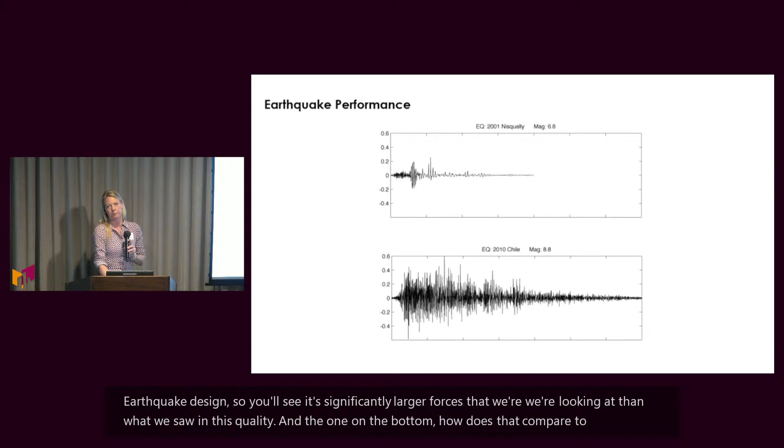And the one on the bottom, how does that compare to the Cascadia one in the YouTube video, and how does it compare to the Japanese one? This would be similar to, a little smaller, but similar to the 2011 Japan Tohoku earthquake.

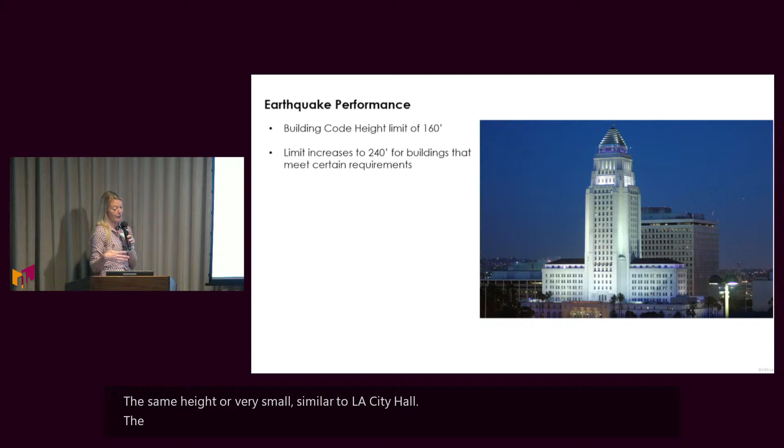Doug talked a little about performance-based design, I'm just going to talk about it more. This picture here is LA City Hall, which is 150 feet tall. In the 50s, when seismic design started to be codified, there was a building code height limit of 160 feet - 10 feet more than LA City Hall. That's where the number comes from. There's no science or math to it, they just wanted it to be the same height, or very close to, LA City Hall. The building code allows for a limit increase to 240 feet for buildings that meet certain requirements. That 240 feet is 1.5 times 160 feet. There's no science to it - it's just a number somebody made up in the 50s.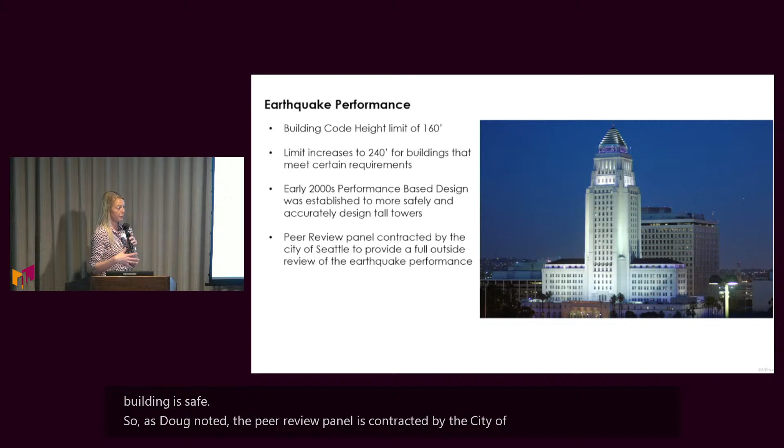In the early 2000s, performance-based design was established to more safely and accurately design tall towers. Performance-based design allows us to go above that 240 foot code limit by going through a more rigorous design process to make sure the building is safe. As Doug noted, the peer review panel is contracted by the City of Seattle to provide a full outside review of the earthquake performance of the building. All elements of the lateral design go through a rigorous analysis and review. Our process started a year and a half ago, and it's a back and forth between ourselves and the peer review panel, with them reviewing every calculation and our models, then asking us questions that we discuss.

Is it 400? Yeah, the question was what is the height of the West Tower. Well, let's just say 33 - 320 feet higher than University Street. That's from the B1 Sunrise Terrace level, and then it goes down about 65 feet below that to the foundation.

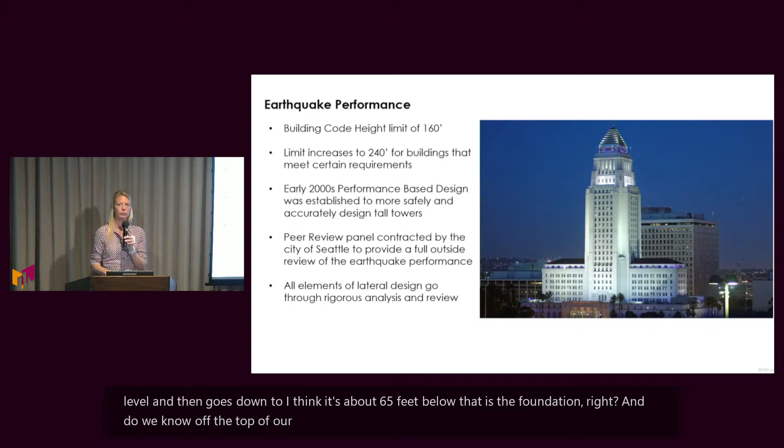Do we know off the top of our heads how high the Central Tower and North Tower are? The Central Tower, I believe, is about 180 feet, if I remember correctly, plus or minus, because it's 18 stories.

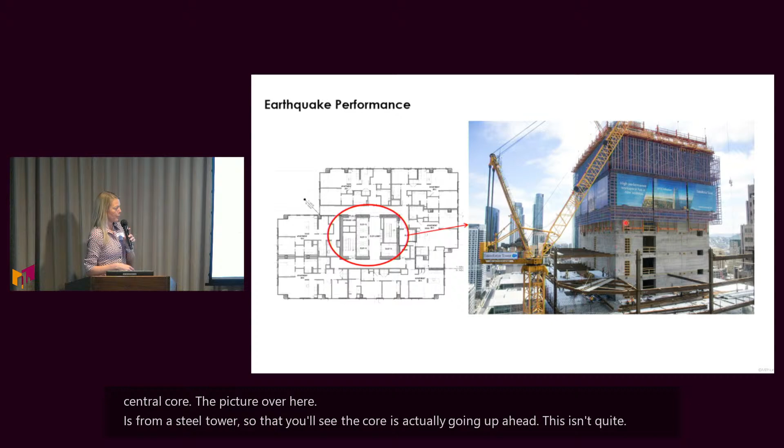I talked a little earlier, and I just want to briefly go over what a central core is. That middle piece of the West Tower, if you think of it, is a big stick in the ground, and that's what is supporting the building during an earthquake. There are other elements that participate in a small amount, but the majority of the work is done by that big central core. The picture here is from a steel tower, so you'll see the core going up ahead. This isn't quite how construction will be at West Tower, but it gives a good sense of that needle supporting the building.

As Doug talked about with the response spectrum on the bar graph, this is the response spectra of the building under ASCE 7-05, a code from 20 years ago, ASCE 7-10 from 15 years ago, and ASCE 7-16, which is what we're designing to today. The blue line is Horizon House - the blue line is the code. Then Doug's team does a true site-specific analysis, looking at this site and the geology, and gives us a specific response spectrum, shown in orange, which is what we're designing for in the design earthquake.

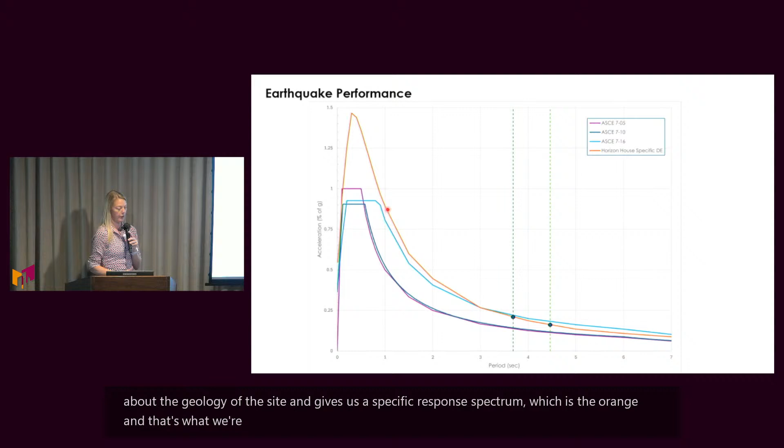So you'll see the two green lines. Those are the building period of the building in the east-west direction and in the north-south direction. And that's what we use to determine how much load the building is going to see in an earthquake.

So you'll see this graph, and what I'm showing is the building under one of these ground motions that Doug has designed. So this is our actual analysis. I'm going to show it to you again, but this time I've magnified it so you can actually see the movement. We're talking like a magnification of 100 in terms of what you're seeing, because as I showed you in the first picture, you can't see it moving if I didn't magnify it.

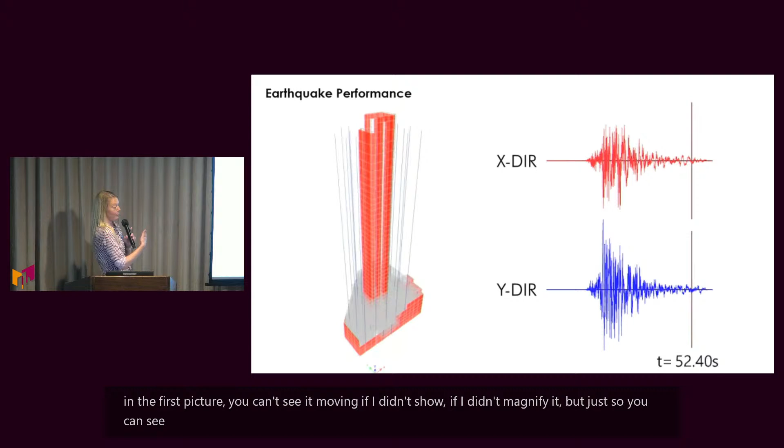So we take every one of these ground motions, run the building through them, and check building movement, building drift, element loads on elements, etc. So it's a pretty significant amount of rigorous work confirming that in any of these earthquakes, this building will still be standing. You can walk out of it.

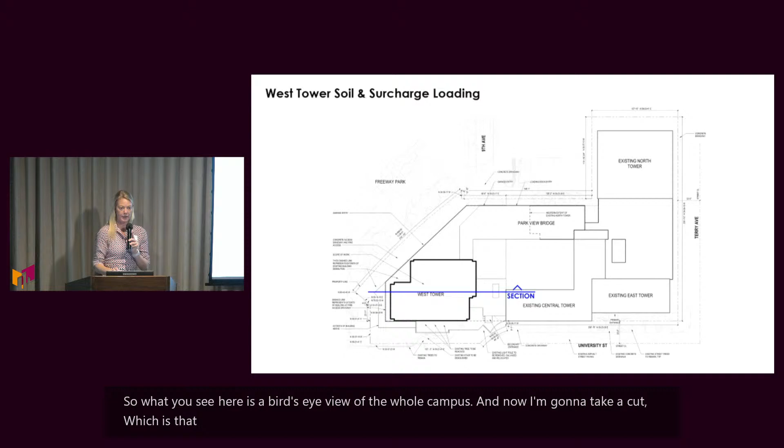So I talked earlier about the two major lateral loads that we design to as structural engineers, wind loading and earthquake loading. This project has one other very special piece to it, and that's the soil and surcharge loading because of the central tower. So what you see here is a bird's eye view of the whole campus, and I'm now going to take a cut, that blue line, through the west tower and the existing central tower.

So what you see here is the base of the new west tower and the slabs in the garage. This is the new perimeter wall, between the new west tower and the existing central tower. Over here in gray is the existing central tower, and as we talked about with the gravity loading, all of that load is pushing down on the soil as the building builds up over its height. So that green line is the weight of the central tower pushing down on the soil.

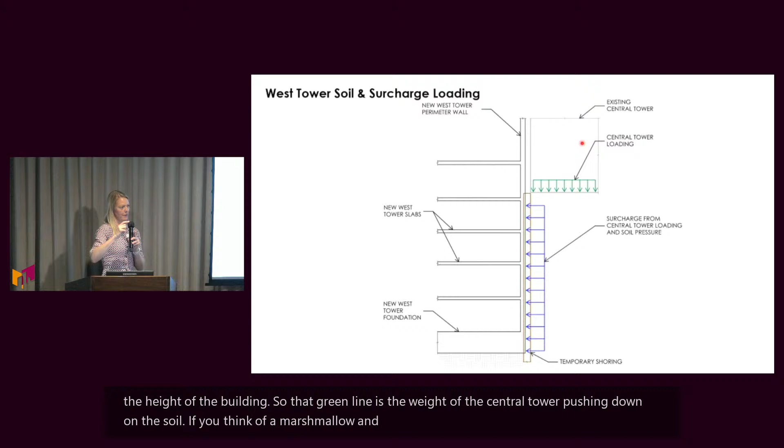And if you think of a marshmallow and you squish it, the sides push out. So when the sides push out, we have to have somewhere for that pressure to go. The blue line is the side of the marshmallow pressing on the new west tower walls.

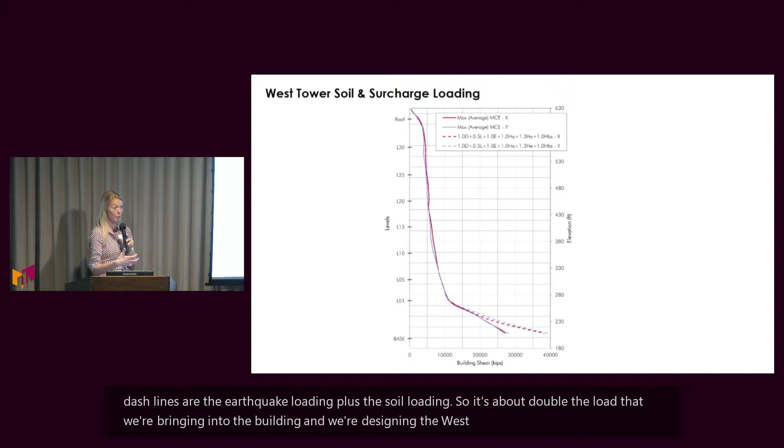Just to give you a sense of scale, the solid lines here are the earthquake loading, and the dashed lines are the earthquake loading plus the soil loading. So it's about double the load we're bringing into the building that we're designing the west tower to support. The central tower will remain the central tower, and the west tower will support it against the pressure on the walls.

One last note is the foundation performance. One of the questions we've been asked is the concern of the building sliding into I-5. I just talked about a lot of load, so how does the building not slide? If you think of it, the soil and the weight of the building coming down trying to shift against the soil creates friction.

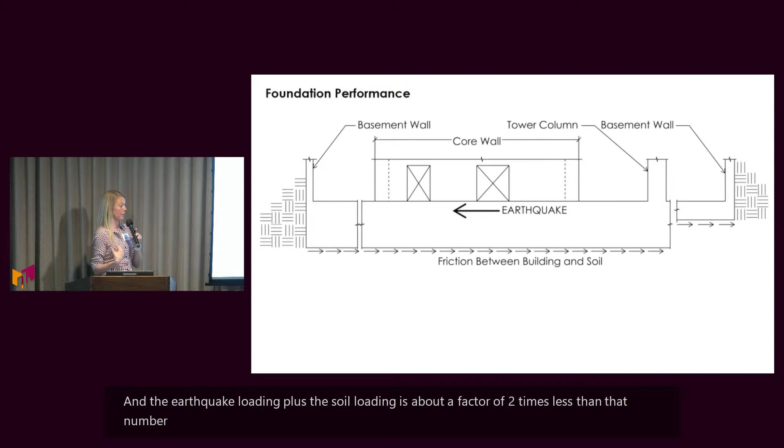Doug's team has given us a number that we can design to, and the earthquake loading plus the soil loading is about a factor of 2 times less than that number. So it's not going to slide into I-5. It'll still be here after everything.

These are kind of hard to see, but the core wall, that central spine of the building, is tied into this mat foundation with large reinforcing that comes all the way down to the bottom. Similarly, we have columns around the rest of the building, also tied into that mat to make sure everything is tied together and it's going to stay.

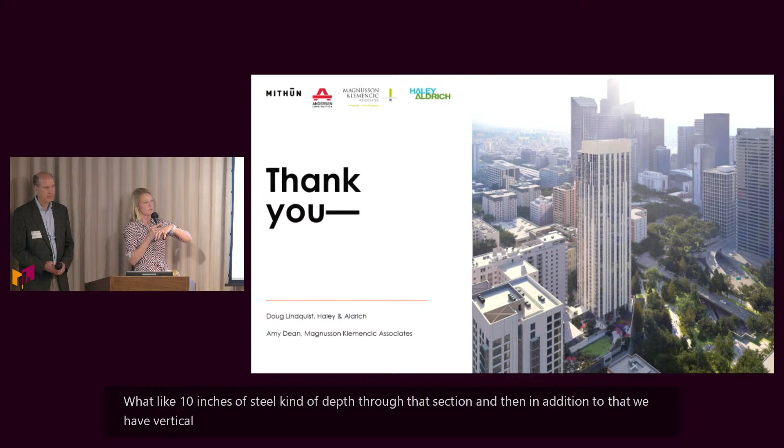The mat is 10 feet thick directly under the core. Under the tower itself, as we go north, it gets a little thinner because the loads are smaller on those columns. But everywhere in that mat, there is reinforcing at 12 inches on center, both at the top and bottom of the mat. Directly under the core, where we've got heavier loads from gravity loading and from the building rocking in an earthquake or wind, we have upwards of 5 layers in each direction of bars at 12 inches on center or 6 inches on center. That's about 10 inches of steel depth through that section. In addition, we have vertical bars specifically in the core and tower area to make sure the concrete doesn't crush under vertical loading.

These rebars going through there - I can imagine half inch, 2 inch, 1 inch, 3 inch - what size bars are they? Yeah, so in general, they're typically 1.5 inch diameter bars. Thank you.

In general, how do we associate the mat foundation in terms of mass? How does that relate to everything above it - is it maybe 20% of the total weight? I don't know the number directly off the top of my head, but it's about 20%. It's a pretty significant amount of the concrete mass in the building, because if you think of it, it's 10 feet, and most of our typical slabs are 8-inch slabs. So it builds up quite quickly, but it's 20 to 25%.

Is there a staircase system planned? How many, and how is that affected as far as reinforcement is concerned? How many stairwells? We have 2 significant ones - how does that affect the whole structure? We have 2 primary stairwells in the core, and then an additional 2 stairwells elsewhere in the podium, but 2 for the tower that go up the entire 33 stories.

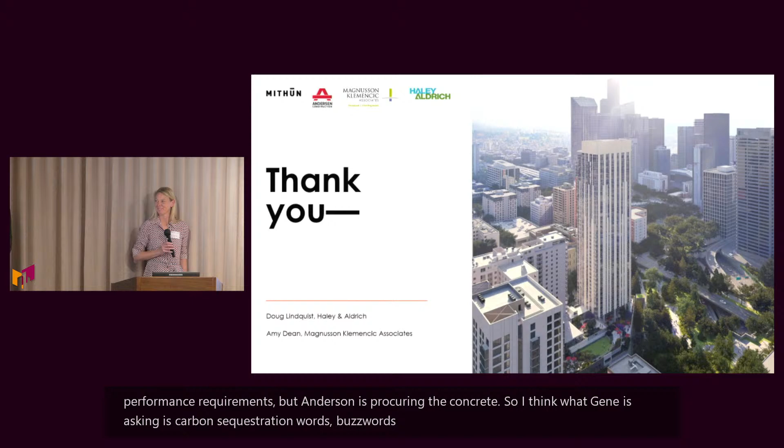Yeah, I can answer that one. There are options for low carbon concrete. Typically what that does is make the concrete strengthen slower over time. This type of building, with post-tension cables and so forth, needs the concrete to get its strength right away so we can stress it and continue up the building. Otherwise it could make the construction of the project 3 to 4 times longer. So it's not a good option for this project, no.

And Amy, I don't know if you have any more technical stuff to add, but that's what I've got. Yeah, what Chris noted is true. We do work directly with Andersen to make sure that what we're specifying, if there are any opportunities to help with carbon reduction, we can do it with an understanding of schedule and workability of the concrete itself. Delaying the project as much as would be needed just isn't feasible. This is Chris Peterson, Superintendent with Andersen Construction.

Yeah, are there any questions in the fireside lounge? Yes, yes.

Are there any other buildings anywhere in the world using the combination of elements in the support structure that you're planning for this building, which have been subjected to weather or other kinds of stress?

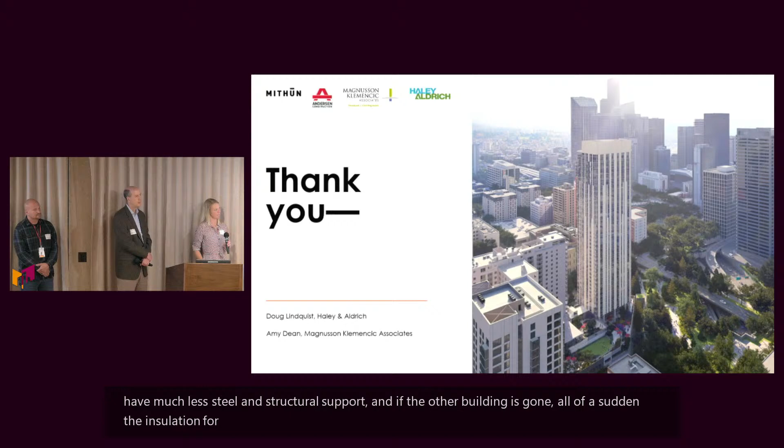Because in the structural design of twin buildings like that, the sides toward where they're next to each other have much less steel and structural support. If the other building is gone, all of a sudden the insulation for that weak side is gone, and you couldn't occupy the building. They would have had to tear it down. That's what astounded us all, but he said that's the way it goes. I thought you'd all like to know that one.

Interesting fact. Any questions in the fireside lounge? All right, back to the chapel. Anyone? Yeah.

Sounds like a great design. However, the issue will be in the construction. Could you give us the surety of inspections so that the issue of the quality of concrete and the quality of steel and its construction will meet the standards that have been designed for?

What kind of quality control is there during a construction project, Chris? Oh, come on, just trust us, right? No, so not only do we as Andersen Construction have our own quality plan where our staff goes through and checks everything that's done by every subcontractor, but also for major structural elements like that, there are third-party inspectors who will be on site full-time who do not work for us, aren't affiliated with us. We hire them directly. The name is Finet.

Finet is our commissioning agent for special inspections. So they'll be doing concrete slump tests, and every piece of it, they witness the work, they check it before it goes in. There's also a city inspector for some of the mild stuff as well, but all the major structure is checked, triple-checked, by that third-party engineer or third-party test agency. Good question.